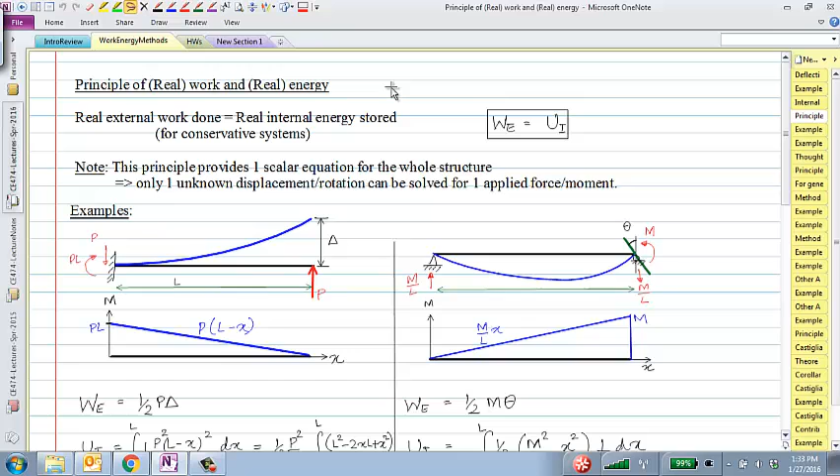Does that make sense? All right, let's jump into the material for today. I think what I'll do is very quickly remind you where we were. We've been looking at this principle of real work and real energy.

Using this principle, we took a segue into the principle of virtual work and virtual internal energy stored in a structure. The idea I was telling you last time was that for such a truss problem—and I should give you a hint here—this is a truss problem, and one of the questions on the sample exam is indeed a truss problem for you to use real work and real energy with. So you can follow very similar logic for that truss problem as I did here. The idea was that if you apply a horizontal load P, the truss deforms from this black position

to this blue position. In that deformation, the force P does some external work, some real external work. Every time we talk about real external work, we have that factor of half sitting there: half times real force times real displacement is the external work done on the system.

In the deformed configuration, both members of the truss act like springs—one is being stretched, the other compressed. When they are stretched and compressed, they store energy within them. So we calculated the real energy stored in both of those members, equated external work to internal work, and found what delta X was, which is all fine and good.

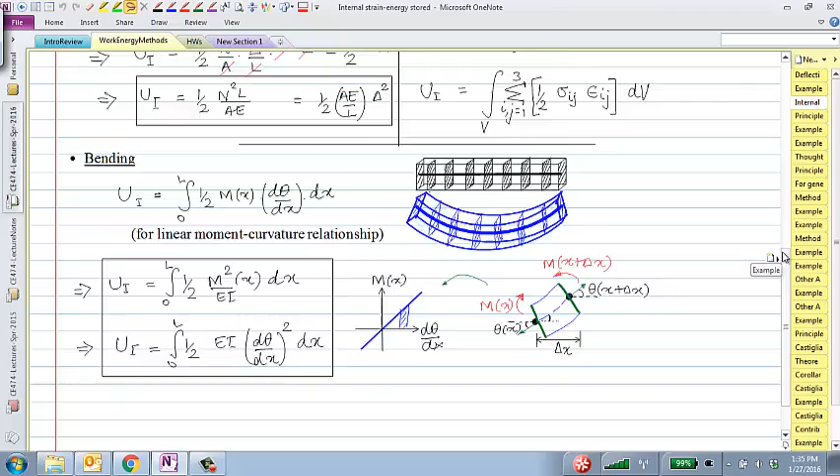That's a good point, because if you remember the way I tried to show you on the first page here, that's the idea you were just talking about. If you load a truss, each and every member—all of these plots are showing the response of each and every member. So even though there are only 2 external forces that do real work, each and every member deforms and stores energy within them. Good point.

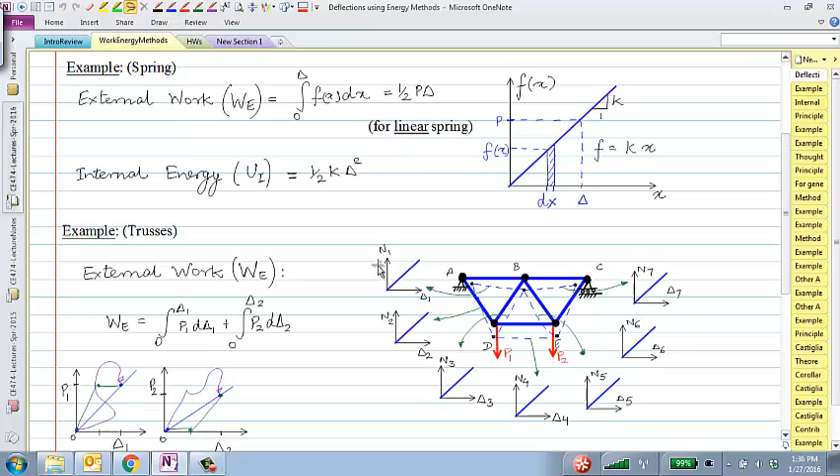That brought us to the question that we can find delta x with real work, real energy, but what about delta y? I cannot find delta y with real work, real energy because it's perpendicular to P, and if it's perpendicular to P, then P does not do any real work while going through that delta y displacement.

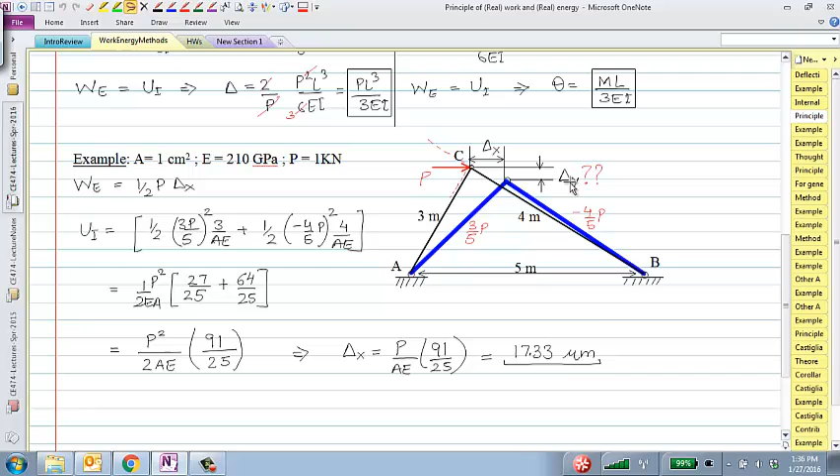So to find this delta y, we do this thought experiment. We apply the real force, and this thought experiment would have two stages. In the first stage, since I want to find the vertical displacement at C, I'm going to apply a small virtual load, P prime. Everything virtual has a prime on top. I don't care what that load is or how much it displaces the truss, as long as it is negligible in comparison to the real deflections.

Once I apply this P prime, as a second step, in the presence of P prime, I will slowly apply the real load, P. When I do that, this virtual load P prime will actually do work on the structure as it goes through this delta y displacement. Even though the real force P does not do any work in going through the vertical displacement, the virtual load P prime does indeed do work in going through this delta y.

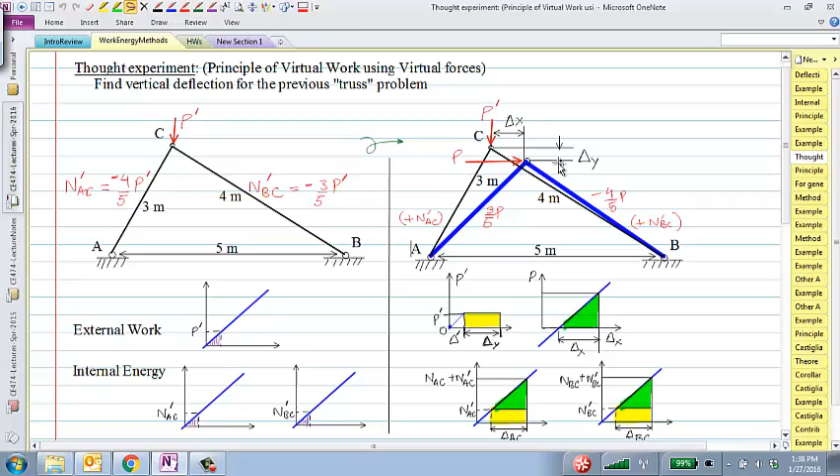And we went through the logic that the total external work done during the process of applying this horizontal P would still be equal to the total internal energy stored within these two truss members.

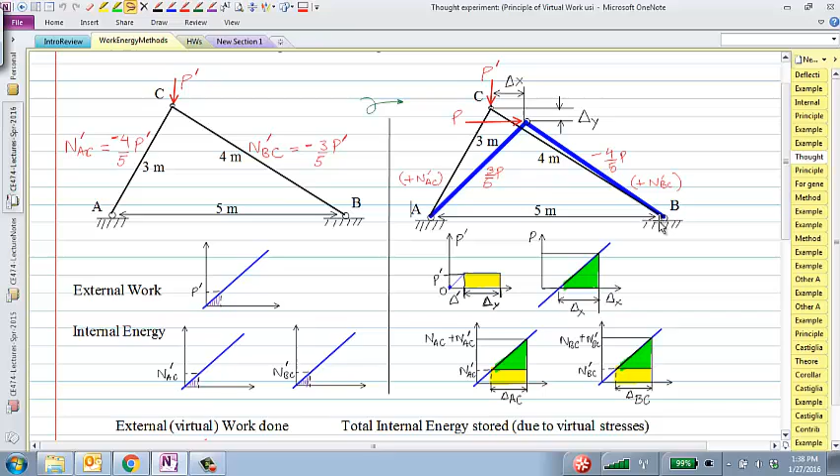I pointed out last time that if you were to plot the load versus deflection plot of the external forces, then the vertical force P prime applied in step 1 remains constant in step 2, and therefore the work done by that P prime would be this yellow rectangle, basically P prime times delta y. That's the total virtual work done by P prime as it goes through a vertical displacement. There's no half there, because it's already reached its full value before the real load stage.

On the other hand, when we do apply the real load in step 2, the real load does increase slowly from 0 all the way to P. In doing that, it does real work in displacing and moving to the right by delta x. So the total external work done is the sum of these two areas, one big green triangle area and one big yellow rectangle, which is in turn stored as internal energy in those two truss members.

Here's the internal energy stored in truss member AC, and here's the internal energy stored in truss member BC. We have already shown using the principle of real work and real energy that this big green area is equal to the sum of these two small green areas. Therefore, this yellow area must also be equal to the sum of these two yellow areas.

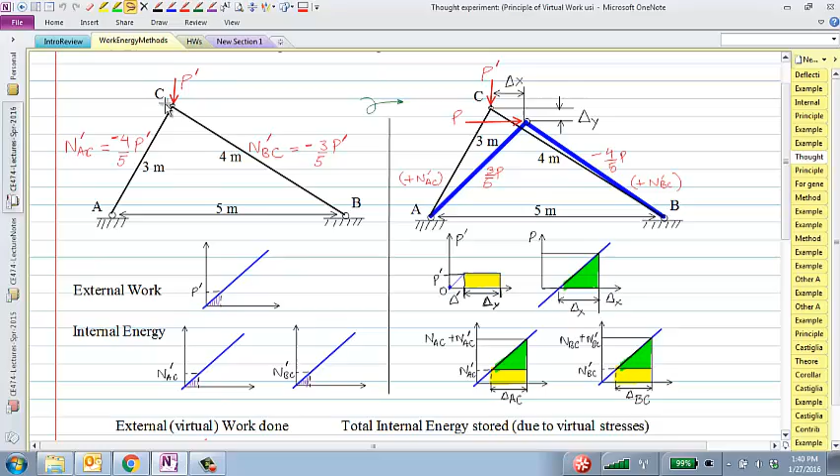And that's really what the principle of virtual work is - that in the presence of some virtual force, the external virtual work done is also equal to the internal virtual energy stored. We'll take a look at quite a few examples of this as we go forward.

Last time, I think we were just about here. We said that the total external virtual work done would be P prime times delta y, this yellow rectangle. Internal energy stored would be N prime due to the virtual load multiplied by NL over AE. Can anybody remind me where does this come from? NL over AE - what is this?

That's right, it's definitely related to PL over AE. Where does that come from? What is that PL over AE or NL over AE? That's right, it's the axial deformation of member AC - this is actually delta AC, so maybe I'll write that here. This entire thing is delta AC. No prime here because it's the real displacement under the real load.

This is virtual force times real displacement. Similarly here, it's virtual force times this - this is real displacement delta BC, so no prime on the BC. And the same logic works for the external work done also: virtual force times real displacement, this is the unknown that we are trying to calculate, is equal to the sum of virtual forces times real displacement for all the members.

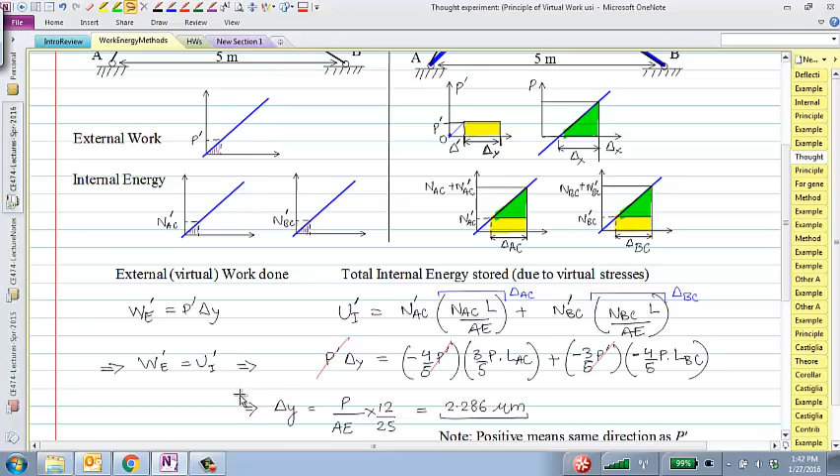P prime cancels off, so it does not matter what value of P prime you choose, as long as it is small and negligible in comparison to the real displacements. So in this way, applying the virtual work and virtual internal energy principle, you are able to find a vertical displacement, even though the real force was in the horizontal direction.

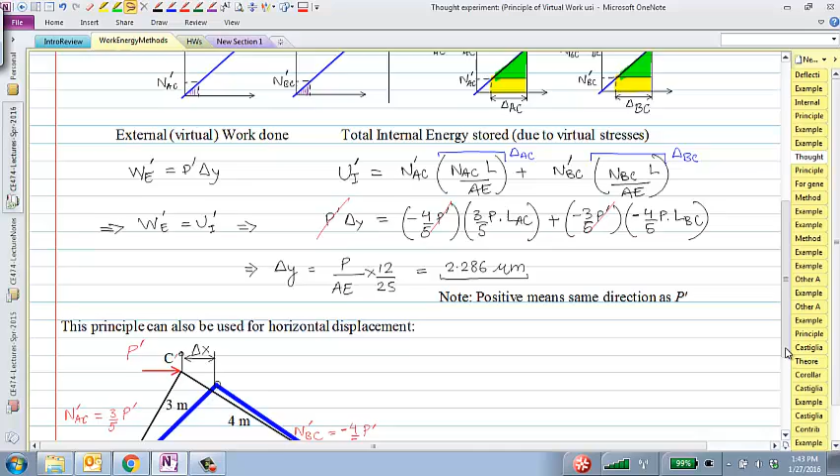And of course, this number you can check with your homework 1 solutions, matches that exactly. Similarly, the virtual force method can also be applied for the horizontal displacement, even though we could apply the real work principle here as well. But you can see that it works for horizontal forces or horizontal displacement as well, simply by calculating.

In the first step, you apply P prime. Internal forces are tension of 3 over 5 P prime, compression of minus 4 over 5 P prime. Then in the second stage, I'm going to apply a real load P slowly on top of the existing P prime. When I do that, the internal forces will build up by plus 3 over 5 P and minus 4 over 5 P.

And what would be the total virtual work done? What would be the virtual work done by this P prime, the virtual force, as it goes through a real displacement delta X? P prime times delta X. Would there be a half? No half, right? Because P prime has already been applied. So for virtual work done, there would be no half there.

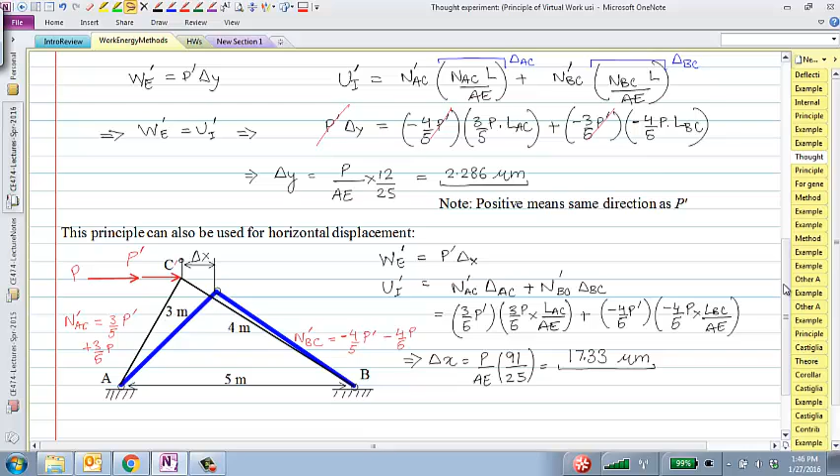So overall, I think the idea, hopefully you all see now, is that if you need to calculate a certain displacement or rotation, you go to that point, apply a virtual force or moment in that same direction. So if you want the horizontal direction, you apply a P prime horizontal. If you want a vertical displacement, you apply a P prime vertical at that point. That's the first step. In the second step, you apply the real load slowly.

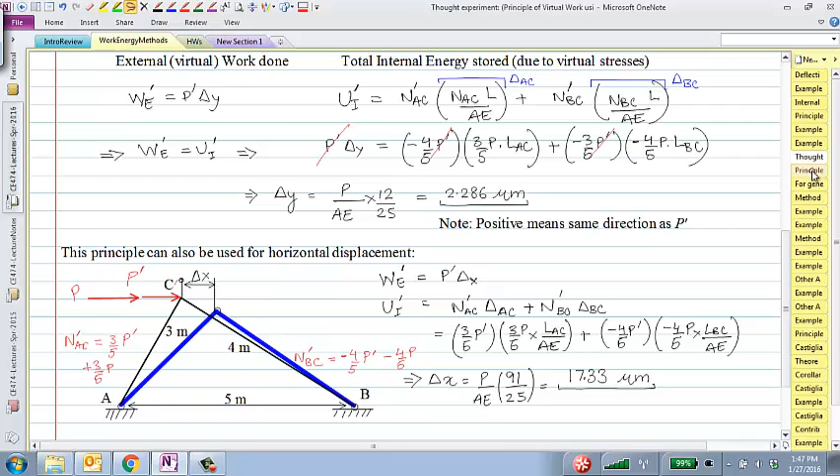And during the second step, the external work done by the virtual load would be P prime times delta that you're looking for. And the same thing would correspondingly be storing internal energy, which is again internal forces times displacement, or internal moments, basically bending moments times curvature. So we'll go through some of those things as we go forward. And that will help me sort of finally outline what the idea is.

This basically is what the principle of virtual work is. External virtual work is equal to internal energy stored. But the way that we'll write it is in the form that virtual external forces P prime times real external displacement, that is usually the unknown that you're trying to find, delta, is equal to the sum over all the elements that we have, and N prime times delta m prime.

Oh sorry, there's no prime—this is a real displacement. So the sum is over all the members in the truss or whatever that structure is. Okay, there's no half in this.

What this also means is that if I divide through by P prime, I should be able to write it as 1 prime, which is just basically a unit virtual load multiplied by the real displacement delta that I'm looking for, equal to the same summation sign, sum over all the elements of the structure, of internal force n m prime divided by P prime, times displacement delta m of each member.

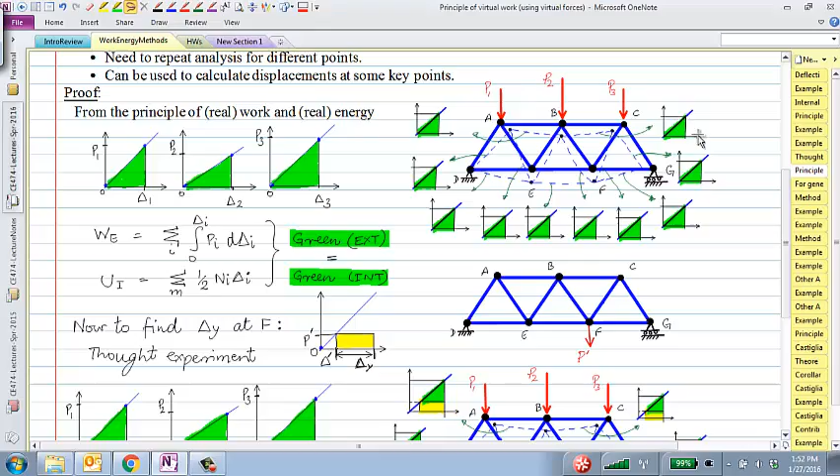As opposed to that real process, if we apply a virtual load P prime, then during the real displacement it stores P prime times delta, and the same virtual energy is also stored within each of its members. Since the green areas are equal, the yellow areas have to be equal, and that's basically the derivation of the principle of virtual work.

This is something I will insist upon again and again as we go forward. If things are not clear, you have to really stop and think deeply about it. Make sure you convince yourself that indeed WE prime is equal to UI prime, which is the principle of virtual work, just because real work WE is equal to UI. That allows us to calculate this unknown displacement delta Y or delta X corresponding to the virtual force.

Another key point here is the principle of real work and real energy. Let me ask you this: if I had a steel column, for instance, and I apply a horizontal load here, and let's say I apply a big enough load that it causes yielding of the steel column—in yielding the steel column, I have done some work that is lost, that's not stored in the internal energy.

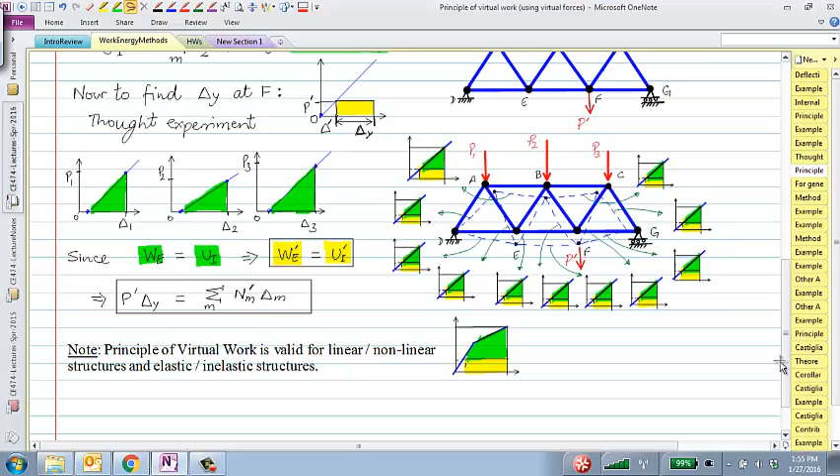But this virtual work, virtual energy method works absolutely fine for non-linear processes also. So it's actually more general and more applicable. Why? Because when yielding occurs, it definitely affects the real work and real energy, but the virtual work and virtual energy still remain that yellow rectangle, and that yellow rectangle would still be equal to the internal virtual energy stored in the members. So the principle of virtual work is definitely more general and works better.

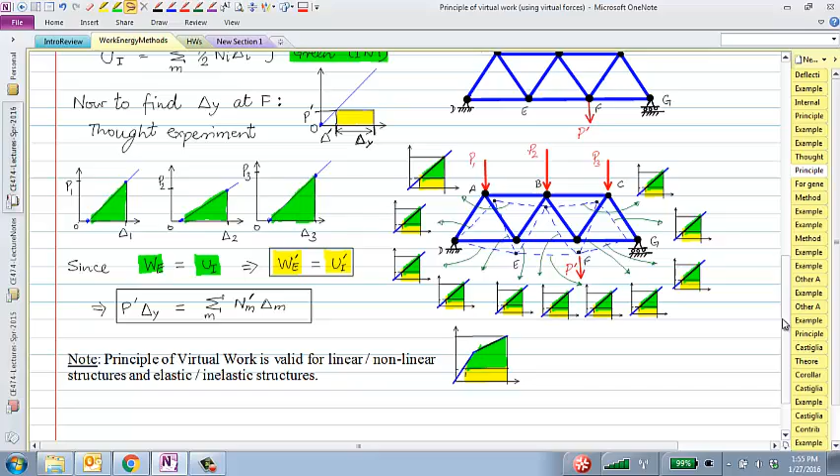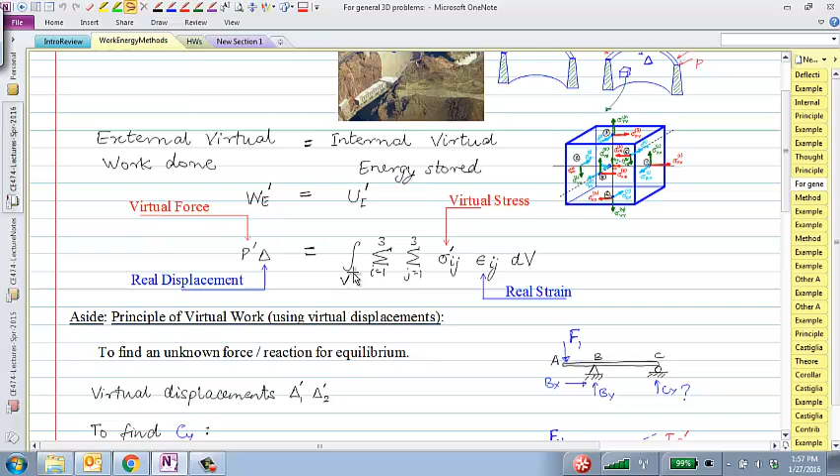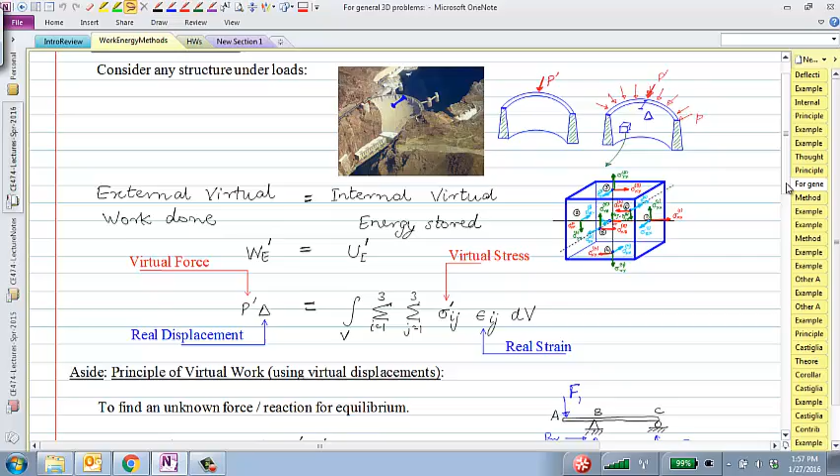P prime times delta is equal to the sum over the 9 components of stress times strain, integrated over the entire volume of the dam. That would give you the internal energy stored in the dam. So in principle it works perfectly fine. Of course, in real life it is difficult to find strains at each and every point. That's basically how you would apply the principle of virtual work for a three-dimensional body like a dam.

Here's an aside that's not in your books either, but some of you might have used the principle of virtual work to find unknown forces before. Have you done that? How many of you have seen that before? Maybe long back in statics, some of you might have seen it.

The idea really is that for rigid bodies — let's say I have this rigid bar, and I'm applying some known force here, and I want to calculate the reactions. Normally, how would you go about it? Yeah, free body diagram and sum of moments, sum of forces, to calculate the unknown reactions.

But maybe I'll back up a little. When you draw the free body diagram and say sum of forces, sum of moments equal to 0, you are using Newton's laws — Newton's first law, that sum of forces has to be 0 for equilibrium. As opposed to using Newton's laws, we can use energy principles, in particular this method of virtual work.

What we'll do is say that if this bar was not in equilibrium, then it might not deform but displace, because we are assuming it to be rigid. It might displace in this manner — it might have a small delta 1 prime here, and a small delta 2 prime here.

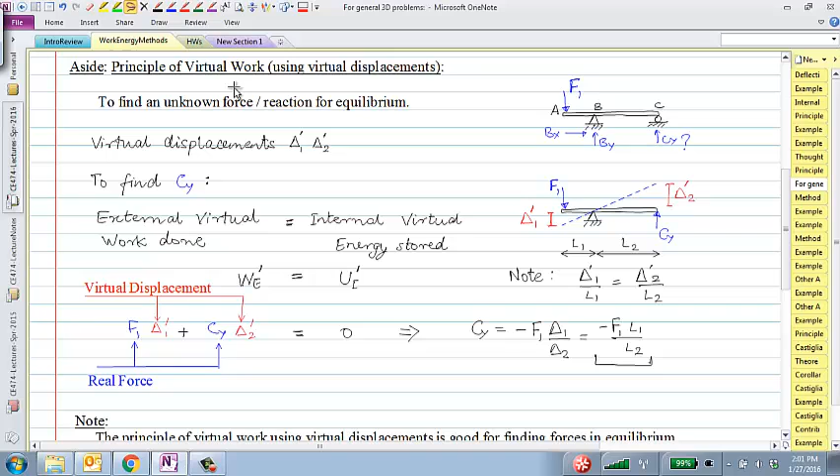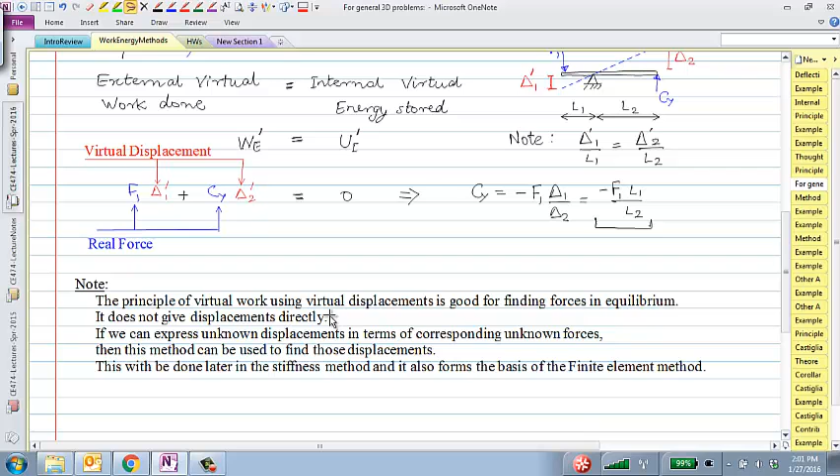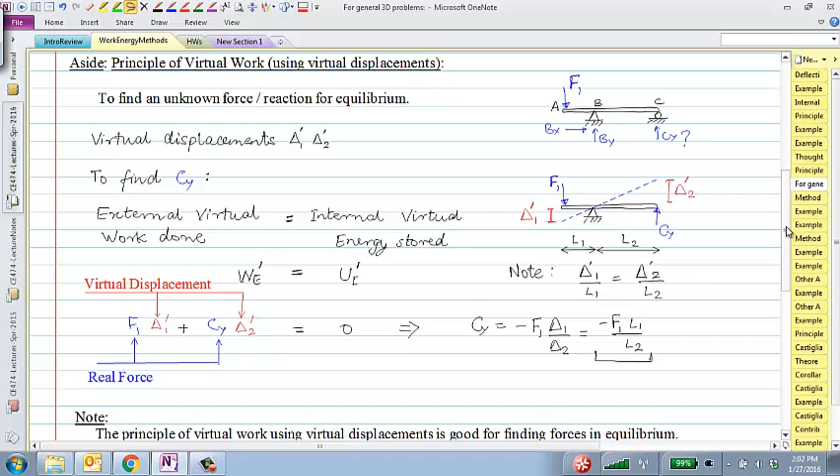As another side note, the principle of virtual displacements is not something we are going to focus on just yet in this course. We are going to look at the principle of virtual forces, basically the method of virtual work, as I showed you. But this principle of virtual work using virtual displacements is indeed used for displacement-based methods that we'll look at in the later half of this course, which forms the basis of the finite element method. How many of you have heard of the finite element method?

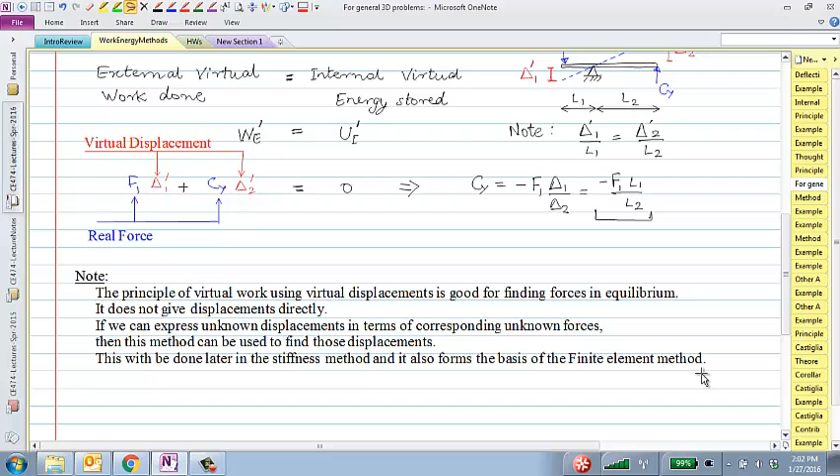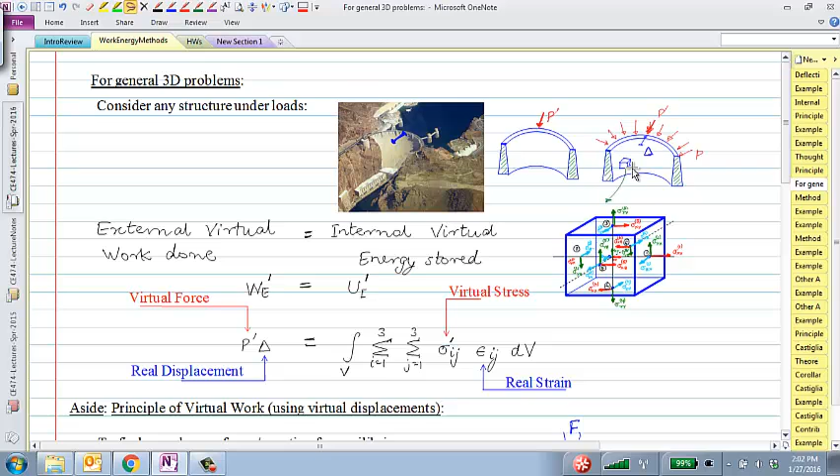Okay, some of you might actually have even used some software. It's basically a software to analyze structures and any type of solid bodies. So this method of virtual displacements forms the basis of that. But for now, we'll look at the conventional method - virtual forces is basically what we'll focus on for now.

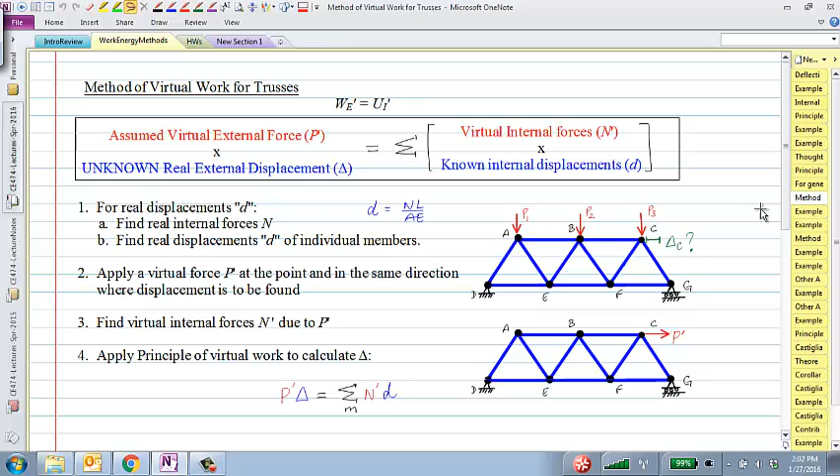All right, so let's take a look at what kinds of problems we can solve with this method of virtual work. What kinds of truss problems we'll look at first, and then we'll look at beam problems. So as I mentioned, P prime times delta and all that, so I won't repeat that again. But here's sort of the methodical way in which you would solve a truss displacement.

So in this case, for example, if I'm looking at the horizontal displacement at point C, then what would I do first? If I have this truss, I have 3 real loads applied to it, and the question says find the horizontal displacement at point C. So how should I go about it? Okay, so apply P prime at C. That's the first step.

And in applying that P prime, that truss will build up internal forces in all of those members. Some members will be in tension, some other members will be in compression. Those would be all virtual internal forces, right, Frederick?

At A - if you put P prime at A, you will find the horizontal displacement at A. Why is that? Because the work done by P prime would be equal to P prime times the distance that P prime travels, right? That's what we've been doing, P prime times delta.

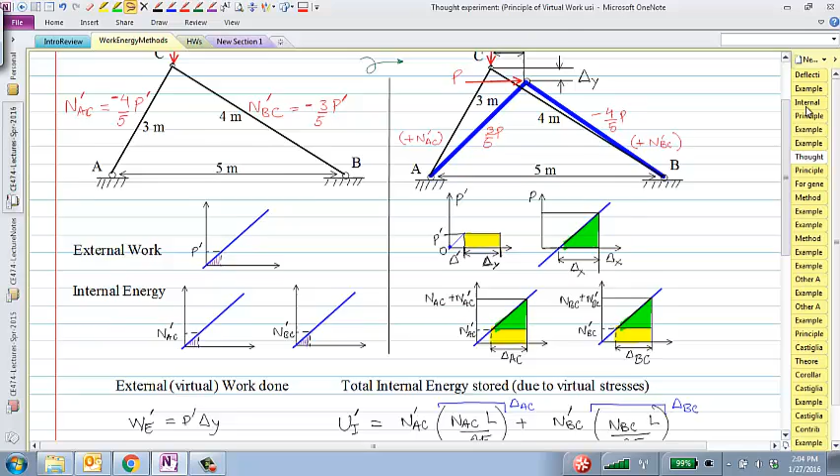Even look at all of these thought experiments - we said apply P prime here. So when we apply P prime, and then in the second step we apply the horizontal load, this P prime remains there and just moves with the vertical displacement to this point. So if you're applying P prime at some point, and that point displaces a certain amount delta in the direction of P prime, that's the total external virtual work done, P prime times delta. If you apply P prime at a different location, it will do different work corresponding to the displacement at that point. So if you want to find displacement at C, you need to apply P prime at C.

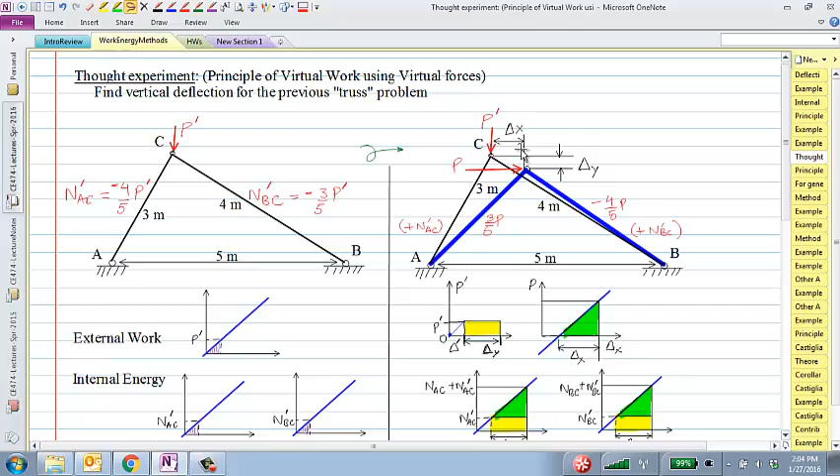Nice - you apply P prime in the opposite direction. Absolutely, you can. Good point here. Even though I've drawn P prime pointing to the right, if it so happens that the real displacement of point C under real loads is actually to the left, then the work done would be negative, right?

P prime times negative delta. Yes, you can do negative work. If I apply P prime in this direction, but the displacement actually goes the other way because of some other real forces in step 2, then the work done by P prime would be negative, and it will show up in your equation, and the sign of that displacement automatically gets taken care of. You don't have to guess whether it will go right or left. Just apply P prime in the positive direction, to the right or up.

So in the first step, you apply P prime, calculate all the internal virtual forces, and in the second step, you apply the real loads, calculate the internal forces due to the real loads. As soon as you have internal forces N due to the real loads, you can calculate the displacement or deformation of each member simply by NL over AE, like we just talked about.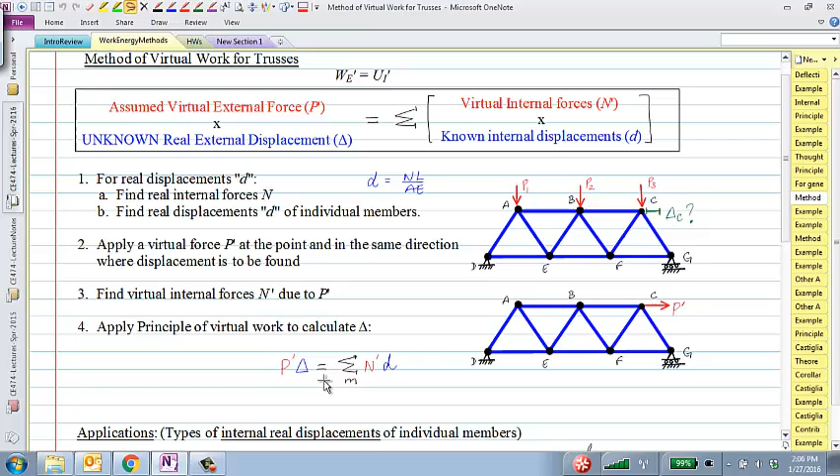Once you have these two things, the analysis for the real loads and the analysis for the virtual loads, after that point it's just algebra. P prime times delta equals the sum over M of N prime times d M. Cancel off P prime, and you'll find the real displacement.

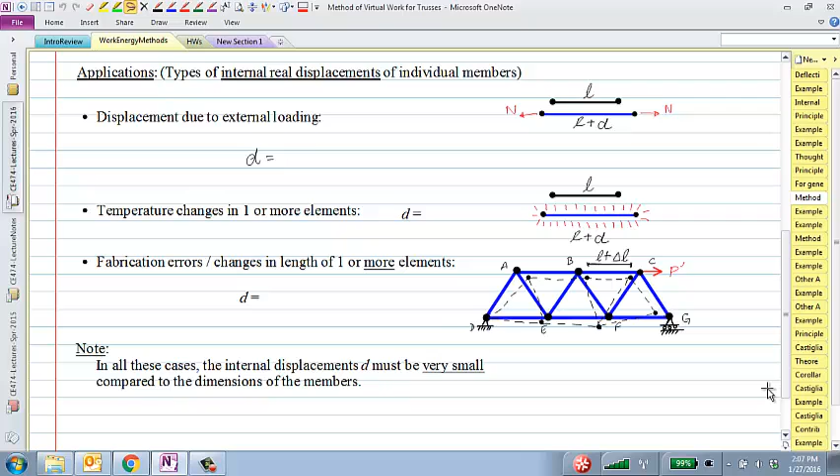Here's an idea of the types of problems you can solve with this method. Some of these problems are actually rather difficult to solve with any other method. As I mentioned, this method relies upon your ability to find the real displacement—I should have an M here and a sub M here as well.

Basically, because we are summing up the internal forces times the internal displacements of all the members of the truss, that's why this M is necessary. So this method relies upon your ability to find the individual displacements of each member. If you can find individual displacements of each of those members, you can find the real displacement at any other point.

Here's how it works. If I have some real external load like this, P1, P2, P3, the real internal displacement of each member would be NL over AE. You find whether each member is in tension or compression, and that force multiplied by the length of the member divided by AE gives the real displacement. If an internal member is in tension N, it will extend by an amount NL over AE. If it's compression, it's going to be negative, right?

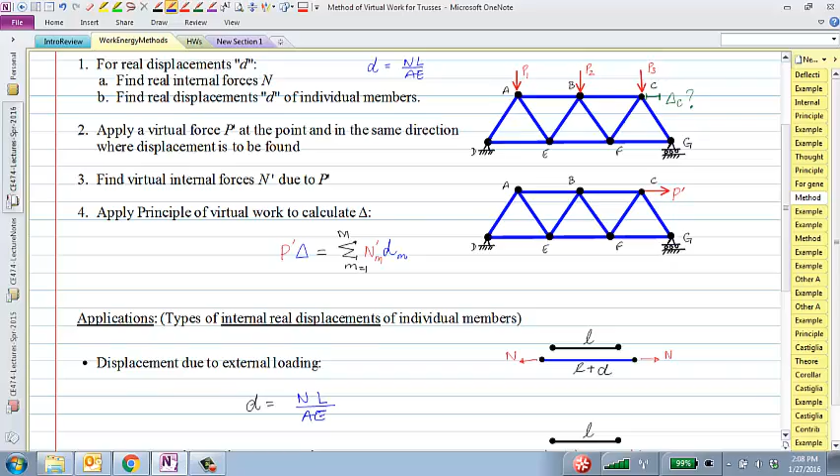How about this problem? Say I have a truss and I heat up one of its members due to a fire or for whatever reason it heats up. Here's a question: I have this truss, let's say there are no external forces applied on the truss. Is this truss determinate, first of all?

Is this truss determinate? Yeah, and of course we can see that because it's a simple truss—a simple truss is just comprised of triangles. So it's indeed a determinate truss. If I now heat up this member EF for some reason, will that heating cause forces in that truss?

Will that heating up cause forces in the truss? For a determinate truss, actually it won't, because when I heat this member up, it will just extend. And as it extends, the rest of the truss would deform and have some displacement, but there won't be any internal forces anywhere.

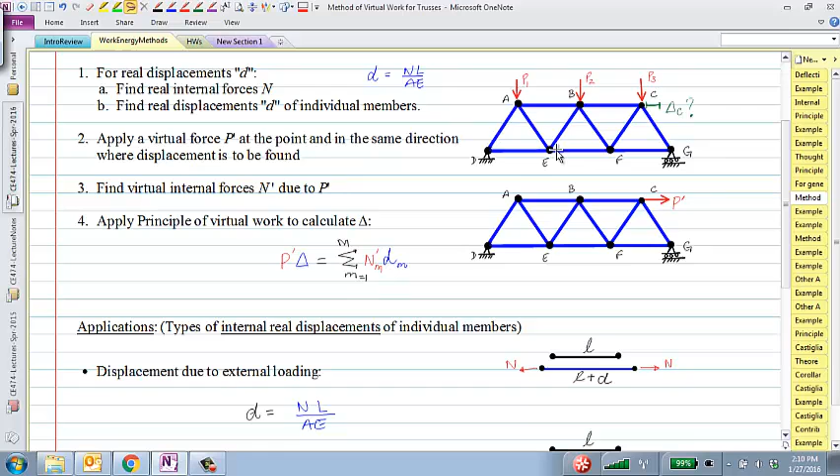It's almost like this: if I assume this to be a truss member, pin it between two nodes—a support here and a roller here—it's still determinate, and if I heat this thing, it will simply expand but not build up any forces. In order for it to build up forces, I need a pin here and a pin here. If I have a pin here, it becomes indeterminate. So indeterminate trusses or structures, when we heat them or cause some displacement for any reason, will develop internal forces and deform. But determinate trusses, when you heat them, there's no internal forces—it just rearranges itself, meaning it will have displacement but no internal forces.

So here's the question. If I heat it by some amount, some temperature T, let's say—I'll write that in blue, increasing the temperature by some amount T—what is the extension due to a temperature increase of T for a member like this truss member?

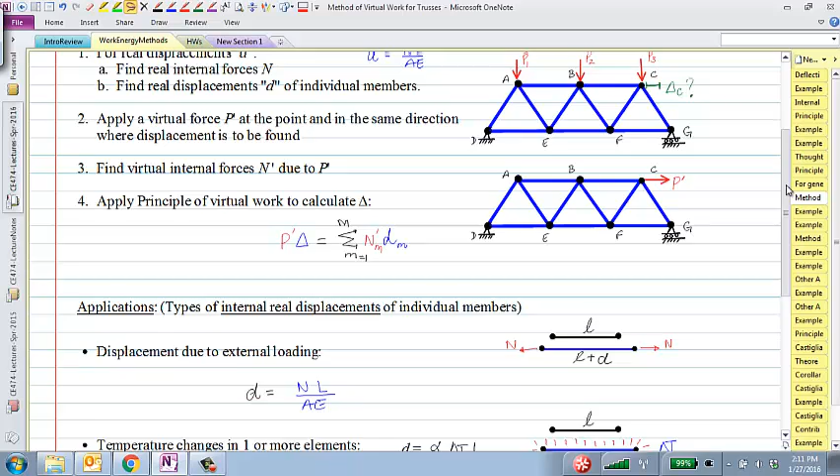Anybody remember from physics? Okay, yeah, great. Indeed, it is alpha, which is the coefficient of thermal expansion of the material, times delta T, times the length of that member L.

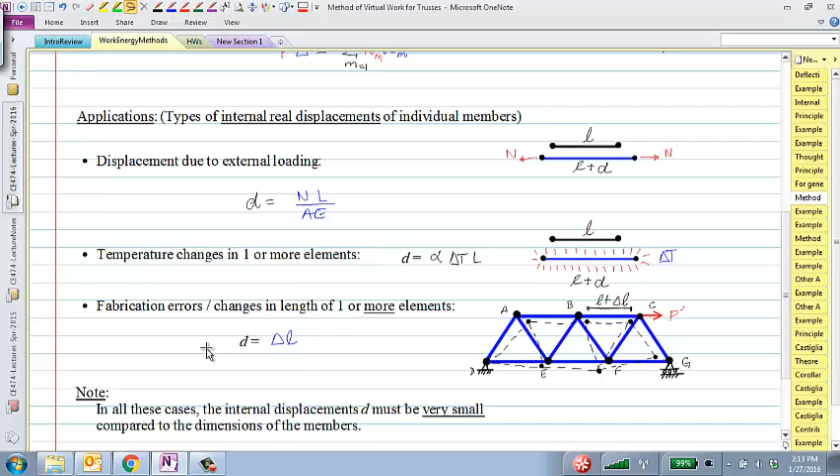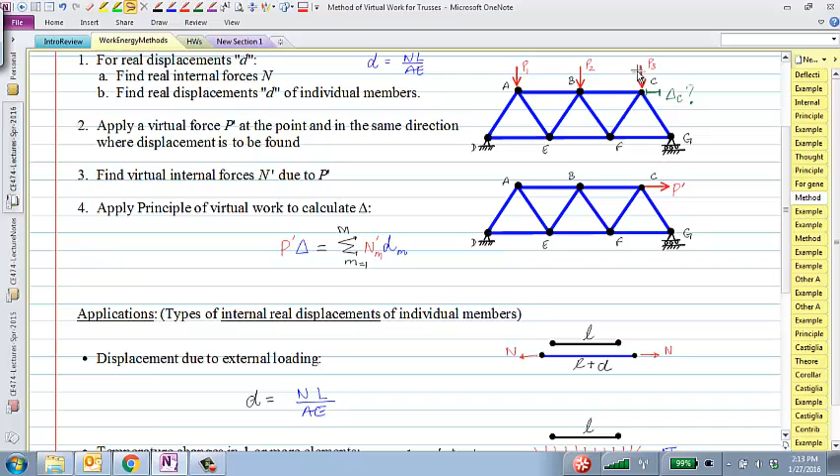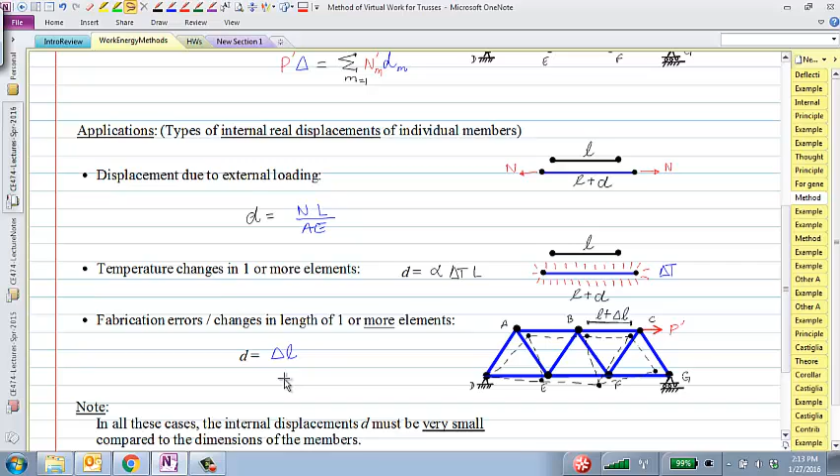So, three different types of applications. One is a regular displacement or deformation of each member due to externally applied loads. Another application is if I heat some members, there will be some real displacement, or if a member is too short or too long by a small delta L, that would also cause a real displacement. These are the types of applications that we are going to look at.

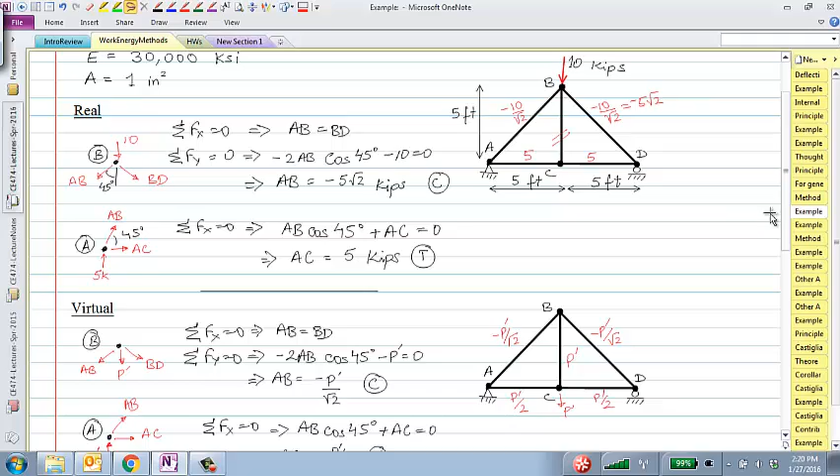I'll do the same thing for real displacements now, noting that displacement D is simply NL over AE. So minus 5 over square root 2 is the real force in those two, so minus 5 square root 2 times L of those two members is 5 square root 2 divided by AE. Same thing for member BD. BC is 0 force, AC and CD are 5 tension, and the length is also 5. So I'll write that here. 5 times 5 is the length of the member divided by AE, and same thing here, and this last one is 0.

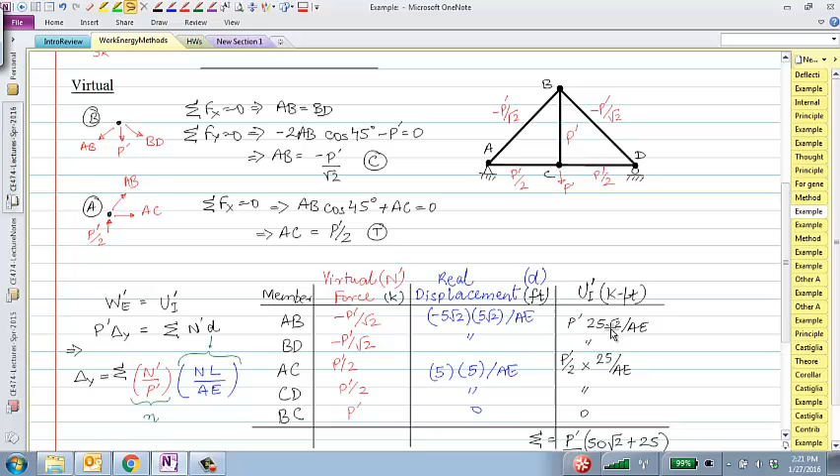So at this point, all you need to do is calculate N prime times D, which is the product of this column and this column, put it here, do that for all those things, sum it up, that would be your internal energy stored, equate external work done to total internal energy stored, and you will immediately find delta Y.